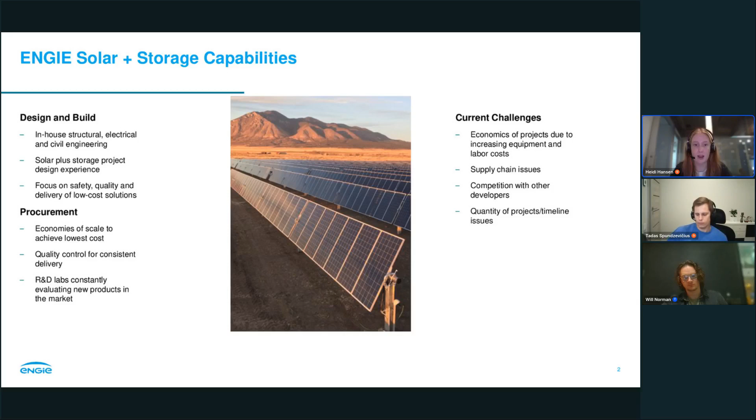One other issue I experience a lot is just our quality or quantity of projects and keeping those timelines on track. So each project needs to go through several people and several teams within my business unit, and it starts with me. So I need to make sure that my design process is really efficient and effective. We're proposing over 200 rooftop sites a year, and that's just rooftops. We also propose ground mounts and carports and battery storage projects. So I need to make sure that my design process is as efficient and effective as possible so that we can be successful. And that has really been where PVcase has been helpful to us.

There are numerous benefits of using PVcase roof mount, but I will just go over a few of them right now. One thing is it is a huge time saver. I would say the average rooftop layout probably takes me about half the time it used to now that I'm using PVcase roof mount, which has been a huge help. I'm able to design several rooftops in a day now, whereas it was most likely just one rooftop I was able to put out a day before this. And another thing is I feel there's an increased accuracy with using PVcase, so I'm able to feel more confident in my drawings.

One reason for that is their shading tool. You're able to input the location of your rooftop, the size of your obstructions, the height of your obstructions, and it automatically takes all of that into consideration when estimating the shading effect and where the shading is going to be on the rooftop. I feel that adds increased accuracy to my drawings. It makes me feel more confident and leads to less redesign down the road.

On the topic of redesign, PVcase makes it very simple. More often than not, I'll need to go back into a rooftop I've already designed and change the spacing or the size. With PVcase, this is a half an hour task. I'm easily able to go in, change a couple inputs, and re-input all of the modules onto my design. It has made that process so much more simple and quicker.

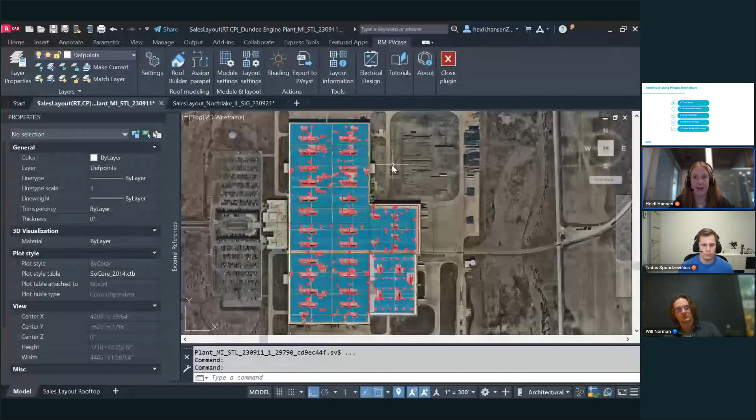Now I will give a couple examples of projects that I have worked on within PVcase, so you guys can see. I'll start off with this example - it is a relatively simple roof, kind of a basic rooftop that I see often in my design process.

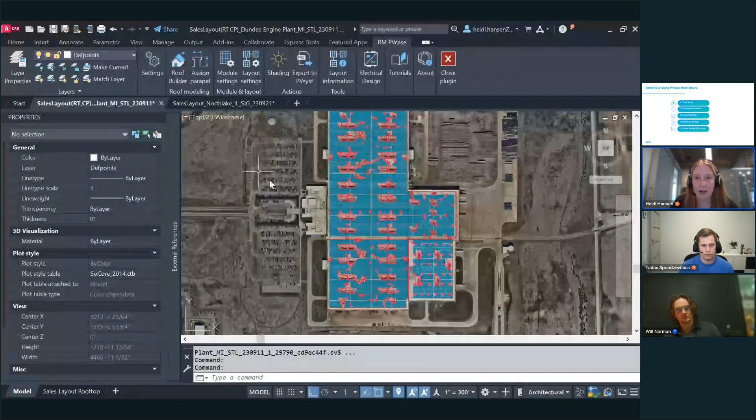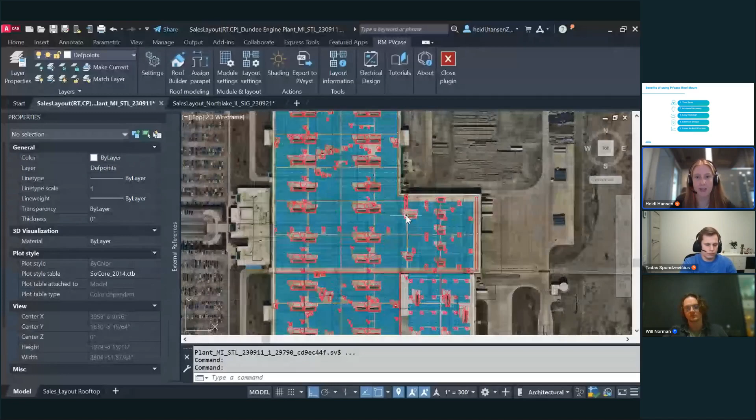All I needed to do here was go through and outline all the obstructions - there are several AC units, skylights, other things. So all I needed to do was find those. Then using the Shading button, I was able to see what their shading predictions would be, add height to them, and then just input my module settings, layout settings, and essentially click my rooftop area and it filled it with modules. Once I've done this, all I need to do is go in and clean up the drawing, and that's a 20-minute process. It has really been a huge time saver and so simple to build these rooftop designs now that I use PVcase.

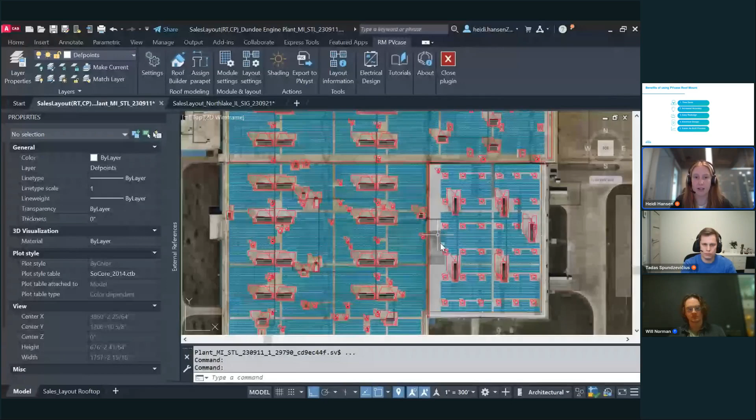One other thing I'll comment is you can see here that I have drive aisles throughout my array. For fire code in the US, you need a limit of 150 feet by 150 feet of an array - it can't be larger than that. There needs to be a drive aisle every 150 feet. Before, it used to have to be me manually measuring 150 feet and adding a drive aisle, but here PVcase automatically does it, so that saves me a lot of time.

Now I'll show you a little bit more complicated example. As you can see on this rooftop, there are a ton of obstructions, a ton of parapet walls, and several places where the rooftop meets another rooftop - it is just a mess. But more often than not, I'm having to look at rooftops like this. Maybe we will be bidding on a portfolio of several rooftops, and most of them look good, but there are a few like this. Before, I would maybe need to spend all day just trying to figure out how much I could fit on this rooftop, what it would look like.

I just need to spend a couple hours getting all of the obstructions outlined and all of the shadows inputted, and then PVcase fills it in for me.

This has been a huge time saver because oftentimes on buildings that are so obstructed, we may not even end up bidding on it, but my sales team wants me to look at it. So instead of spending almost an entire day on a rooftop that we're not even going to build, I just spend a couple hours to tell my sales team, okay, we can only fit this much on the rooftop, this is what it's going to look like, it's not worth it for us. This has been a huge time saver and really made a difference in my workload.

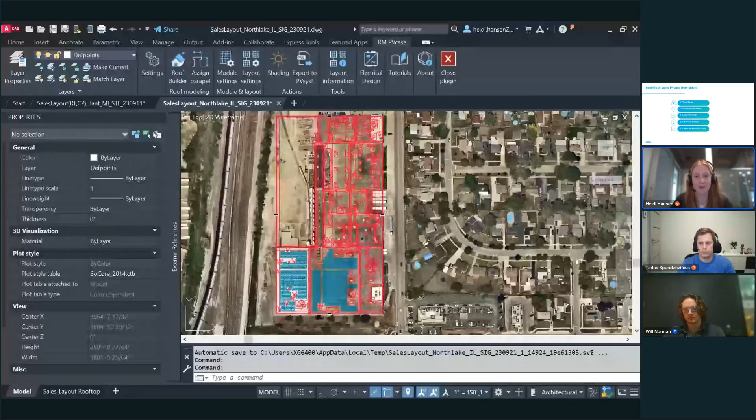Okay, Heidi, thank you very much. First of all, just want to double check if you can hear me. Yes? Okay, wonderful, always like to make this pre-check.

Thank you very much for your presentation. It was amazing to hear the size of project you're doing. I still have a couple of questions, if you don't mind, based on the presentation you've done. One of the things you mentioned is that as the Engie group and as yourself, you're trying to prepare as accurate a design as possible at an early stage, to prepare your quotation as close to the final product or final design as possible. Does this take into account any iteration, or how do you usually arrive at that final layout? Do you just design one approach, or are you comparing a few different layouts? Could you share a little bit on that topic, because it's quite interesting to understand.

Yeah, many times I will do several iterations on a rooftop and need to go back in and redesign. PVcase makes it really nice where I'm able to see all of the iterations I've already done on this design, and that has been really helpful. Often I'll need to change spacing and do several iterations on that, and PVcase has been really helpful for that and a huge time saver on it.

Okay, wonderful to hear. The other thing I'm also interested in is related a little bit to the supply chain. Of course, Engie has an amazing way of managing this by purchasing things up front and stocking them in your warehouse. But from your experience, how often do you need to redo even your early stage design? Because, for example, the module supplier changes, or you decide to use a different inverter, or some other things come up. So is it often the case that you need to redesign what you already did, or is this more exceptional, rather than the rule?

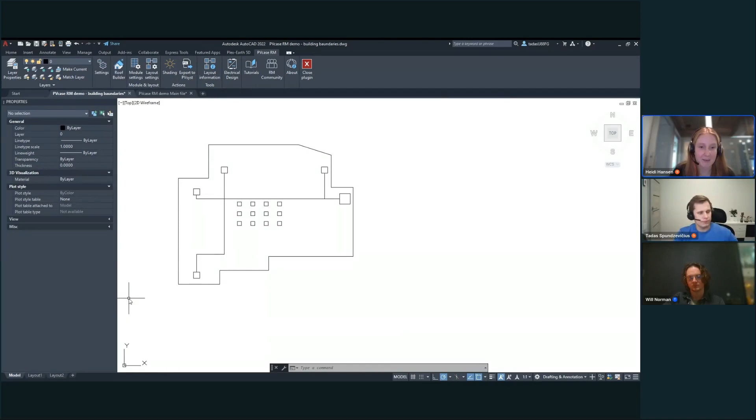Yes, I would say it took me less than a month to get PVcase down. Me and my colleague worked very closely with Tadas, and he helped us understand the product. But I think it's really simple, and for any AutoCAD user it's really easy to pick up. Once you get it down, you're able to do the process so quickly, it's like muscle memory.

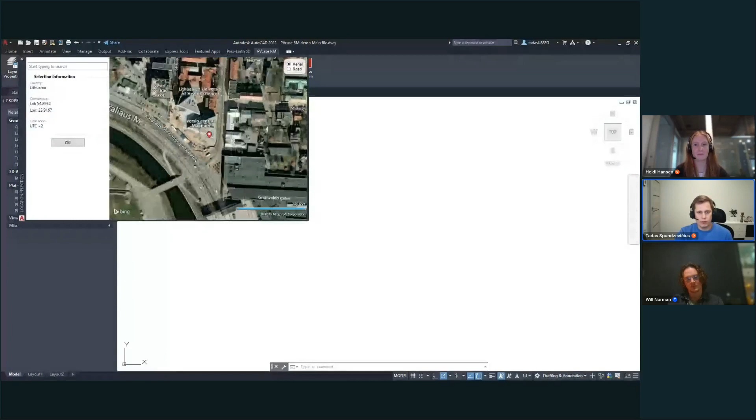The way how we can start the design, basically there are two main principles. The first one, we allow you to import the satellite image. Keep in mind we can also use different metric unit systems, like metric, feet, inches. But what's most important, we can just set up a specific location where we want to import our satellite image. For example, here we are in Lithuania at our headquarters. So we set up one of a warehouse or manufacturing facility, and this gives us the satellite image.

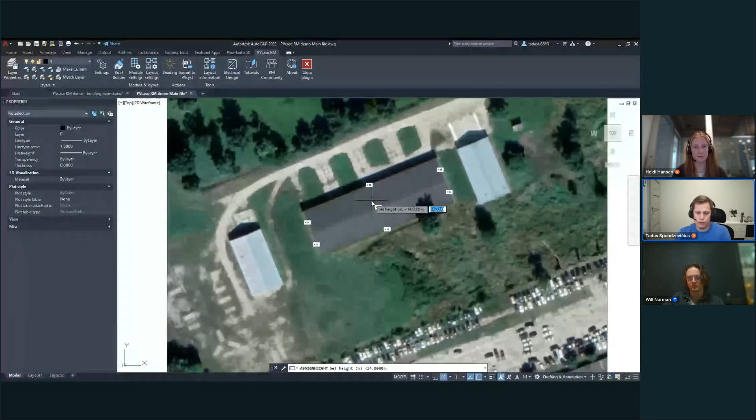Of course, on this satellite image we can draw as a simple AutoCAD file, let's say defining the boundaries, assigning the height of a building, and this will be created as a 3D building. If it has a ridge line or different slope, this could be recreated as well. So this is one approach when we start design just by having a satellite image. Usually this is used at a really early stage, when we don't have a lot of information or haven't had a chance to visit the site.

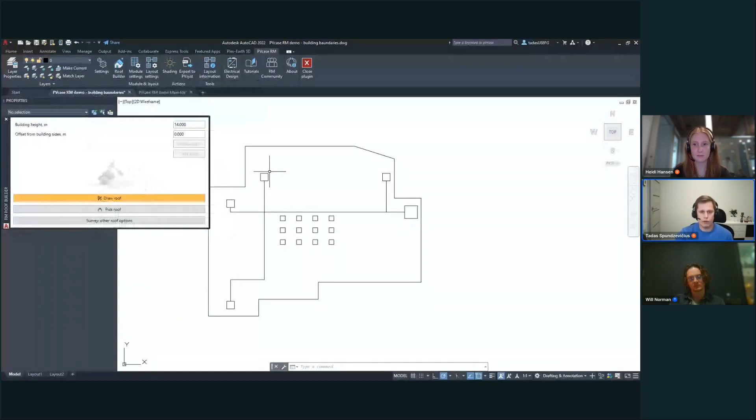If you're at a more detailed stage, there's another approach where we can use the existing building boundaries. In this case, I have a simple 2D building boundary with some elements in it. The software will allow the user to recreate this in a 3D manner, from 2D to 3D. I think this creates a lot of value for users because you can see and exactly understand how your project will look. First, adding the building itself, adding the parapet of a building for more precise evaluation of shading elements and the shading impact.

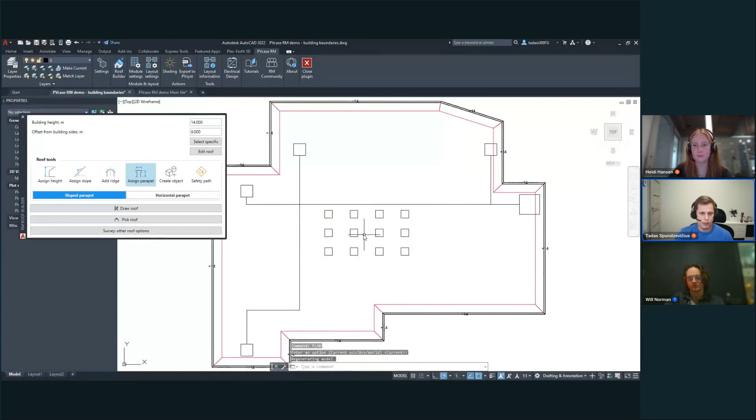Of course, we can set up a setback from the edges. This also allows us to share this view with a customer for a better understanding. Similar elements, usually found on the roof, or obstacles, could be converted from 2D elements to 3D, or just added accordingly to our predefined parameters. So always keep in mind there are two ways you can convert or add the elements. Also, you can define the safety path and all the similar elements which you usually find on the roof. For example, we have an AC unit - here it is.

We can define the restriction zone, the height of it, and simply pick up from the drawing. So we have 1, 2, 3, 4 of them, and they will be converted to the 3D elements. For the end, if we have entrance on the roof, we can also convert this one too.

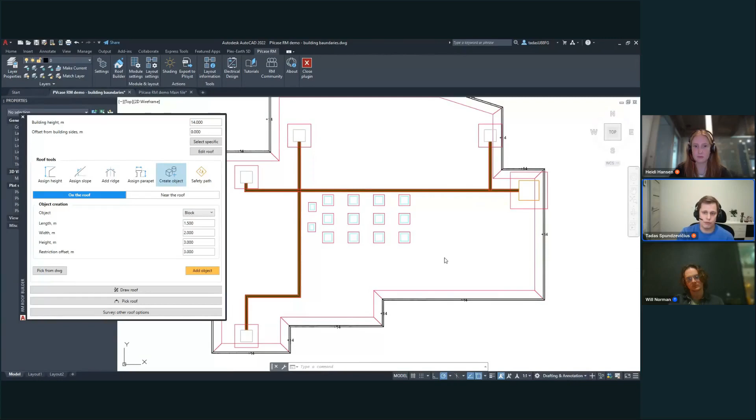We often get asked whether PVcase works with AutoCAD LT. Keep in mind this one is compatible just with the full version of AutoCAD because it's using 3D elements for the design proposal. If you look from a 3D point of view, everything created is a 3D element, and AutoCAD LT currently doesn't have the capability to read or understand these elements.

Now this is just the beginning of the design. Meanwhile, first of all, we just set up more or less how our roof will look and what kind of capabilities we will have. Let me add some restriction zone as well here, adding some area, and now we have our roof defined.

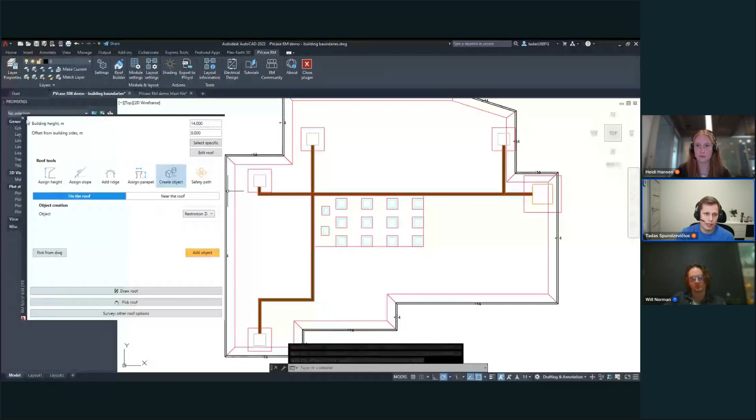The other thing we wanted to point out, which is really useful and I think a lot of businesses and engineers doing design also take into account, is shading analysis. PVcase right now has a first shading analysis tool. Later on we will introduce an improvement, which will be available in less than 2 weeks.

The current version analyzes shading based on the sun position angle. Basically, we take into account the location of the project, the day and time set up, and based on that we take the sun position angle from a database.

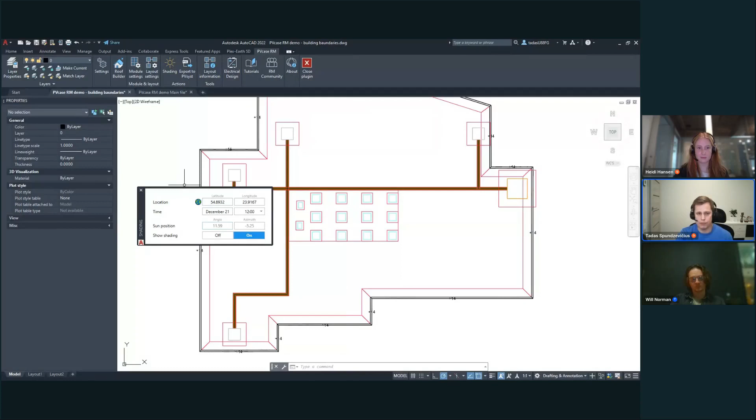If you change the time value here, you'll see the sun position adjusted accordingly. We can also set up and change the date - for example, April, let's say 2 o'clock - and you see the sun position angle, and this will cast the shading projection. If you change the time value throughout the day or year, you'll see a different shading projection created, and this is automatically created as an offset area, without placing any modules.

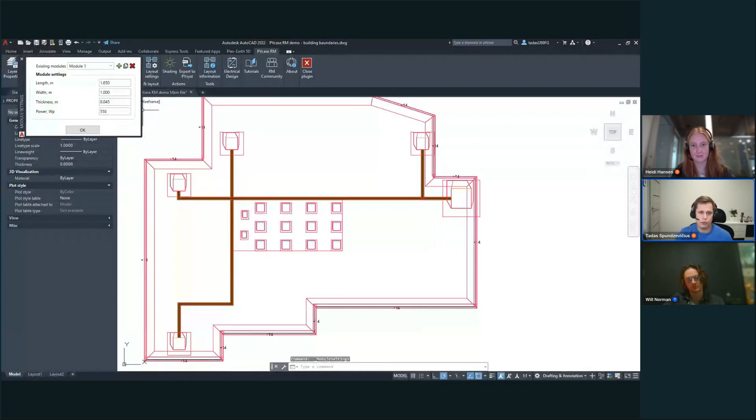Now, to place our modules, this is quite simple and straightforward. As Heidi mentioned, we just add the module dimensions in the product - length, width, thickness, and power. We add the layout settings.

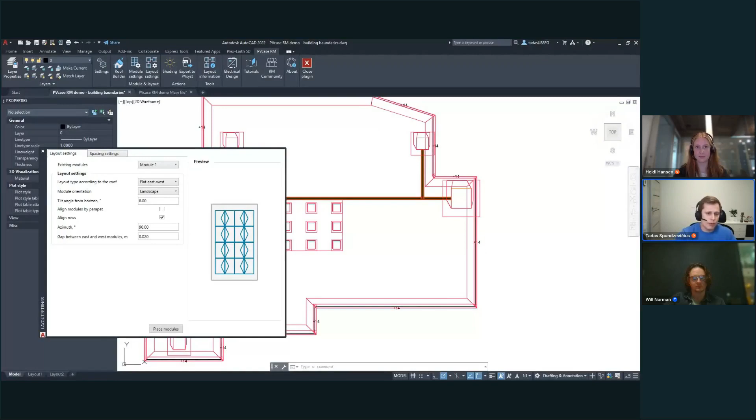The layout settings first of all allow us to set up a different system - for example, flat south system, east-west system, flush mount system. This even enables the user to define and create a few different system types on the same project, on the same roof. When we create the roof, we simply generate the layout on the whole area where we didn't exclude placing modules.

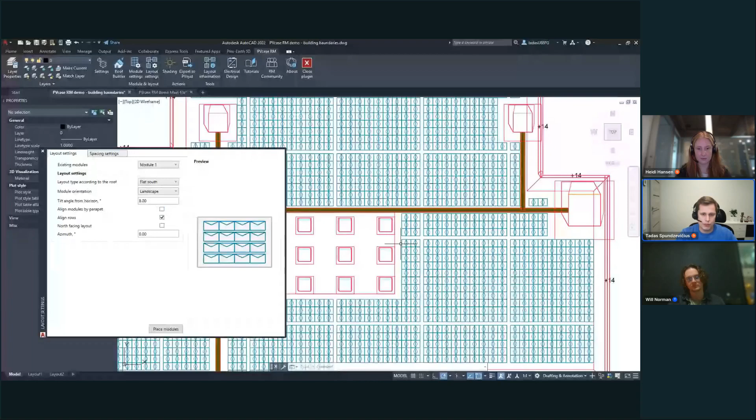The other thing that's really simple to do is make iterations. For example, now we have a layout for an east-west system. I'm just quickly adjusting a few settings - later on I'll explain in more detail why I did it. Let's see, now we also generate a flat south system on the same roof without changing anything. As you can see, it takes just a fraction of time and the layout will be regenerated.

What we can see from this, and what we can already compare, is the installation capacity, the module quantity, through the layout information. The software saves each of the drawings we've done - you can expand the list and see the current capacity and current module quantity. Each of these layouts is exportable directly to PVsyst if you need detailed energy reports.

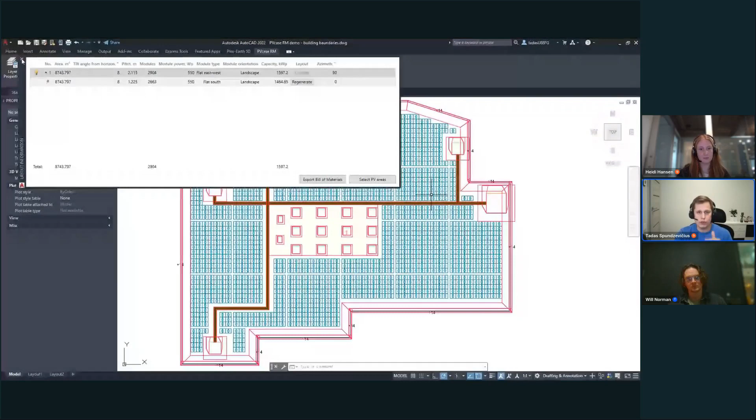Even more, we can always regenerate the previous layout, meaning you can go back and forward between a few different layouts, and this allows you to store them. Even if the customer wants to see an east-west system, flush mount system, or flat south system, you can simply do everything in one AutoCAD file, in one DWG file, instead of having 3 or 4 of them.

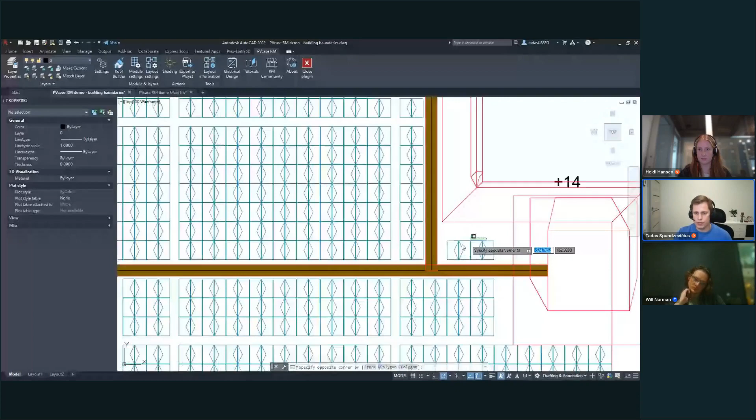Now about the customization of the layout itself - this is usually quite complicated with some tools if you want to customize everything to the module level. With the AutoCAD software, we allow customization of everything to the module level. The user can select and delete modules, move them around, and make all kinds of changes just as you would with simple AutoCAD block elements.

Now, what I didn't cover here from the spacing settings, but you can set up first of all the row spacing and the column spacing between modules. For example, this one specifically works nicely with east-west system.

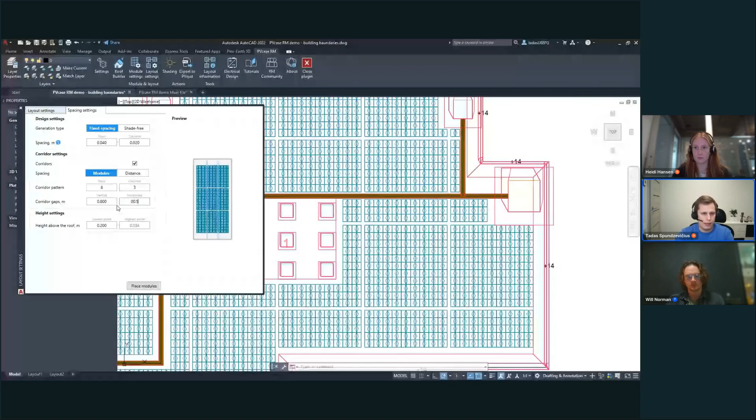On top of that, we can specify the corridors. For example, in USA, this kind of corridor is used for fire protection. I think they have a 30 feet requirement, but every 30 feet you add an additional corridor. Here in Europe, we can use a different approach where the corridor is based on the module quantity. For example, we have 8 rows, 3 columns, and this will create small subarrays, and in each of these subarrays we can place the string.

Let me show you how the result would look like. Quickly regenerating it, now I get the layout of smaller subarrays where I can nicely fit my string. Of course, we can look around and eliminate some of the modules which do not fit our needs. So this is basically how the layout creation and iteration works - we can really quickly and easily go back and forward.

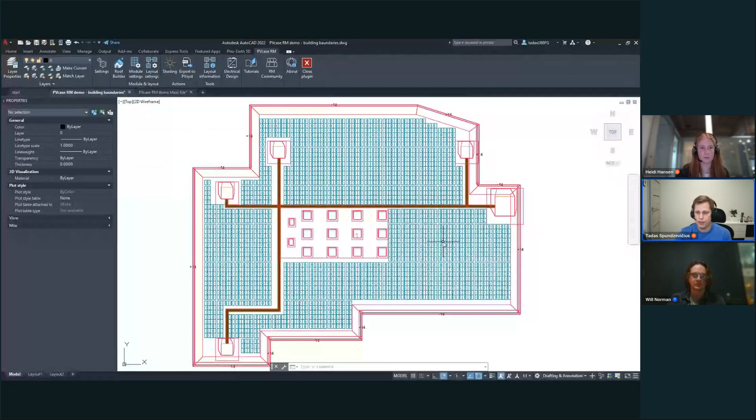Keep in mind that here we have approximately 1.5 megawatts, and it took less than 10 minutes to generate this layout. Now, on top of this, the next huge portion of the software is electrical design. As Heidi mentioned, even if you are not an electrical design engineer, you can still do some electrical estimation at an early stage.

But if you want, you can also do it at a really detailed stage with electrical design, because we allow users to configure inverters, meaning you can configure everything down to the MPPT level. So how is this done and achieved?

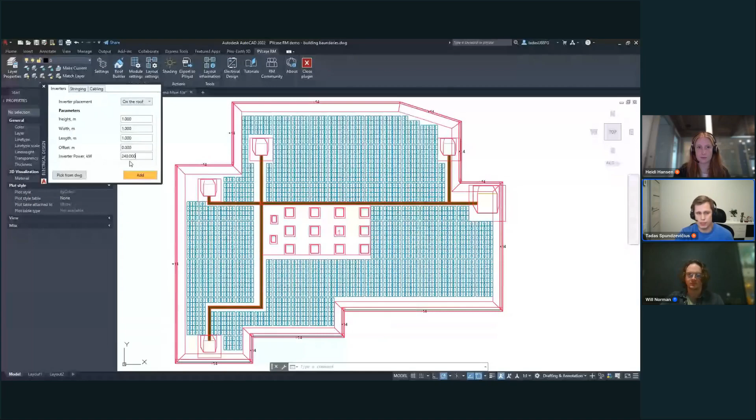First of all, we add the inverters. Inverters are defined with really generic parameters - we're not using any database because we don't need that. We add the inverters, let's say on the roof we'll have 6 of them if needed. Also keep in mind that inverters could be placed in different locations - it doesn't exactly have to be on the roof.

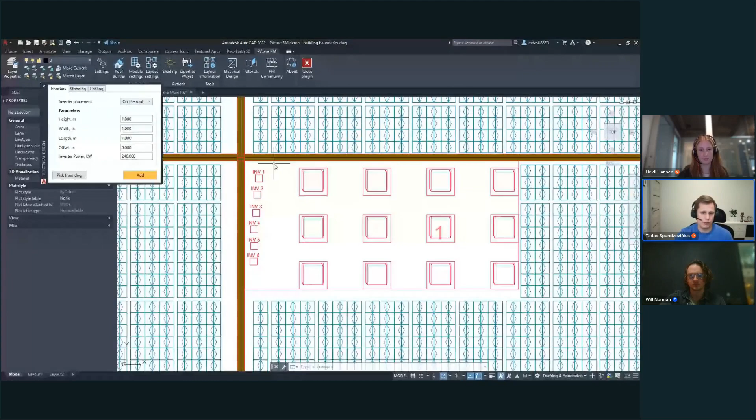You can place them inside the building as well if needed, and in that case you'll be able to define the height. So this simple approach allows you to use any inverter you want. Even if you have inverters with different size or capacity, you can define and add each of them separately. Just to give you examples, we're adding all of them with the same size.

The stringing - this is where the software could be really simple, but at the same time, if you want, it could help you make really detailed stringing. So how does stringing work in general? It works based on the string size, so we can define the module quantity per string, let's say from 20 to 24, set up if you need optimizers to use, and what stringing pattern to use.

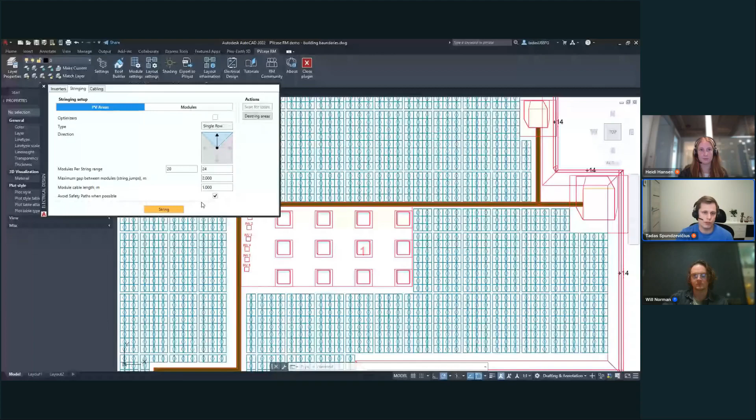So you can use single row stringing - in this case, software will cover the strings which can have just a single row. Let's increase this gap, then we can have a different stringing pattern. You can also set up a direction - is it vertical or horizontal? Of course, each case will provide different outputs. Software always tries to place as big a string as possible according to the defined settings.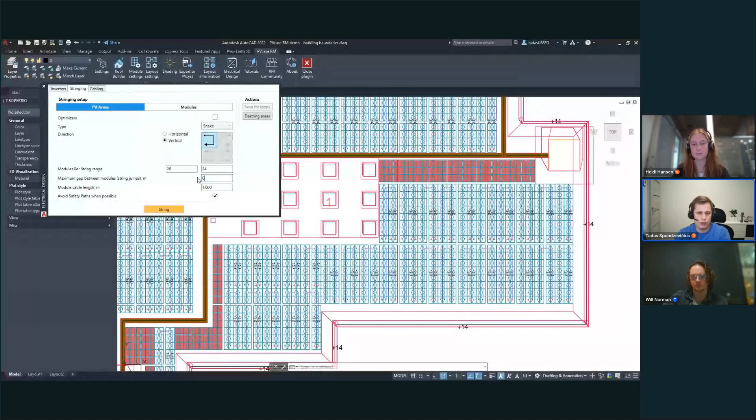My preference is to use this tool usually for detail design. So what you can do here is control the maximum gap between modules. Let me show how this works. I define this as 40 centimeters, then my corner gap is 50 centimeters. In simple words, I'm limiting the software to place the string within one small subarray. I can also define a module cable length to estimate and calculate all the gaps between modules.

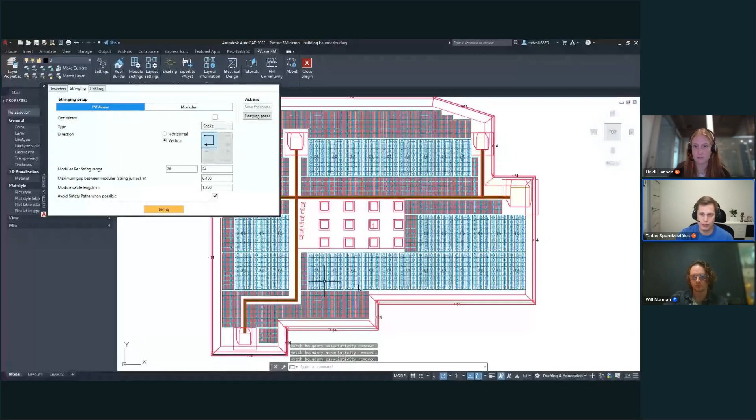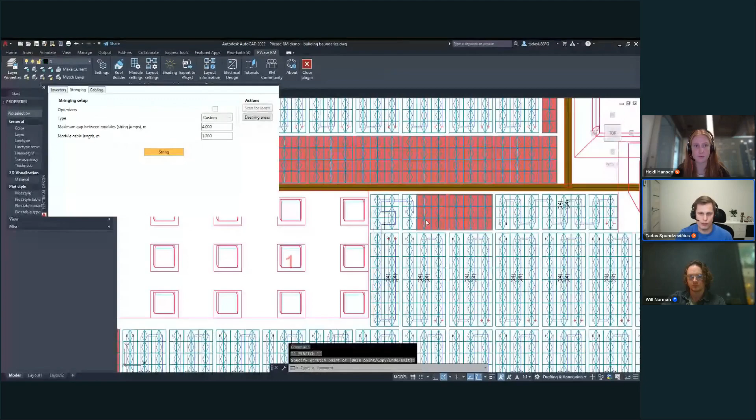And this gives me the initial layout. On top of that, I can change these settings, change how the strings will be applied, and get more detailed stringing. So let's see, selecting the zone where I want to work. With custom stringing, I can get even more customization - I can just draw a simple line on the layout, and as you can see, it's counting the modules for me. Everyone who has done stringing manually knows this is one of the biggest nightmares for engineers, just counting how many strings you will have.

Usually you just lost the number and need to redo it, and as you see, it could take just a few seconds. So this one is a more customizable approach, and you need to get the exact result which you are expecting, so then we can do it step by step. And of course, we will guide you even more for the user who will be interested to test it.

If you want to do it quickly, you can also define this parameter as 4 meters between two different modules, apply this for the layout. It will take a second, and it will generate the preliminary stringing throughout the layout. We can also change the direction, so by changing the direction, we'll get a little bit different output each time, because it starts to do the stringing from a different point. That's why the final result will look different.

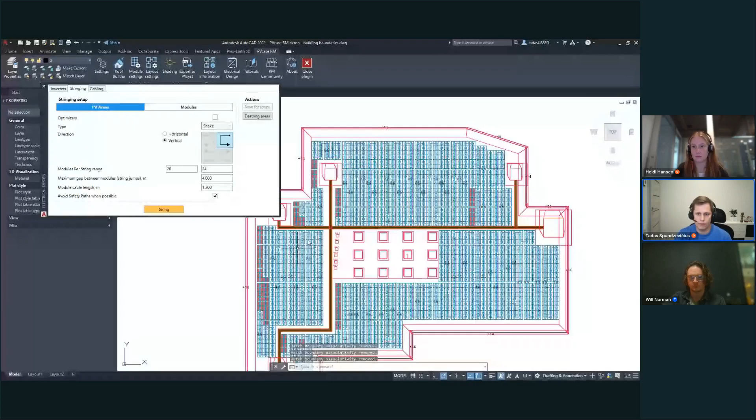Even at this stage, we can easily customize the layout by deleting some modules which we don't want to have, by extending the string. So for example, here we have 24 modules. Let's say we want to have 26. We can easily and simply customize this here.

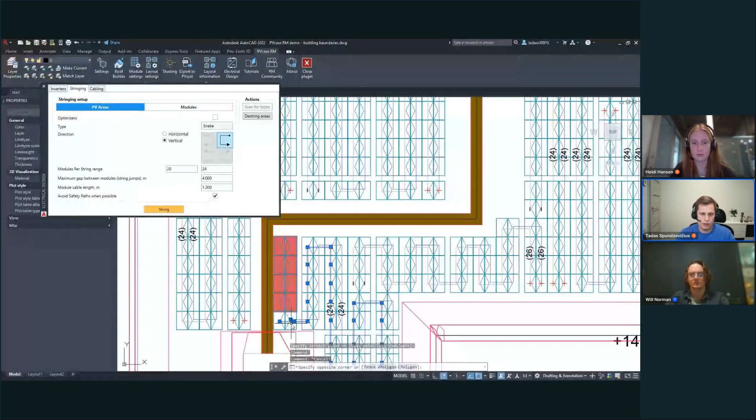And we can do the similar thing for the string. Just selecting the string, here it is, selecting the string and just extending to two more modules. So let's say we have a string here. Okay, let's do it like this, and 25. So I want to have 26. Here we go, 26 modules.

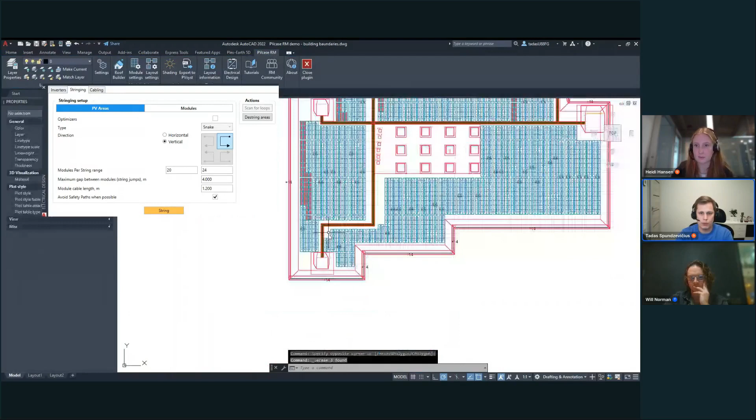Once again, we can eliminate some of the modules which are not necessary. If I see the position where I want to add some additional strings, I can simply do that. And of course, I can draw like a zigzag pattern. I can always use the Ctrl-Z button, let's see if I draw it incorrectly, so this will allow me to come back to the specific point. So the tool here is trying to become as detailed and customizable as possible throughout different engineering stages.

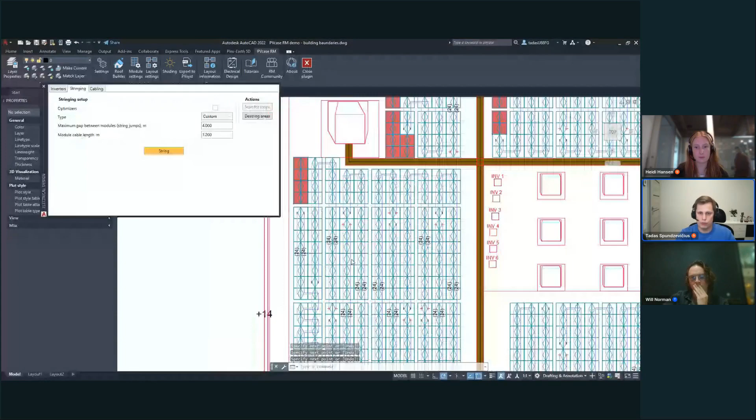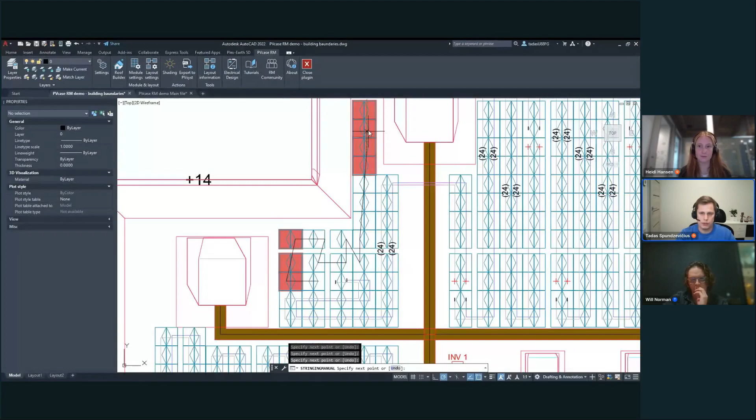Okay, let's move forward from the stringing. Let's say this is more or less the layout which we prefer to have. Let's add a few more strings. Oh, by the way, I didn't mention that every design which was done could be simply overridden. So as you can see, I'm just drawing a string on top, and the software automatically changes accordingly to my new pattern which was drawn. So let's add some additional string at this end. This one goes to 19 modules, and let's eliminate something that is not really effectively placed for us.

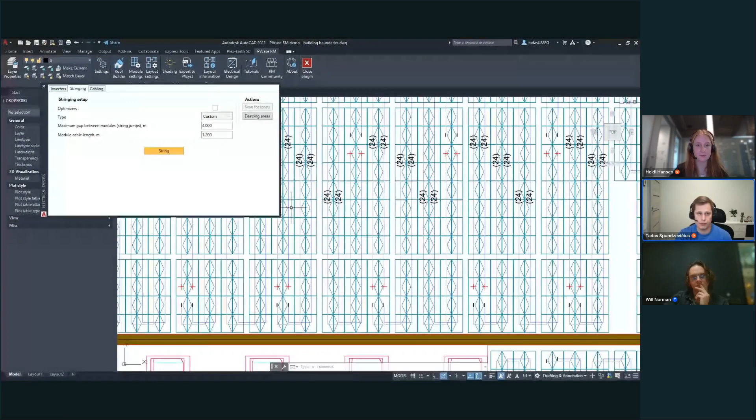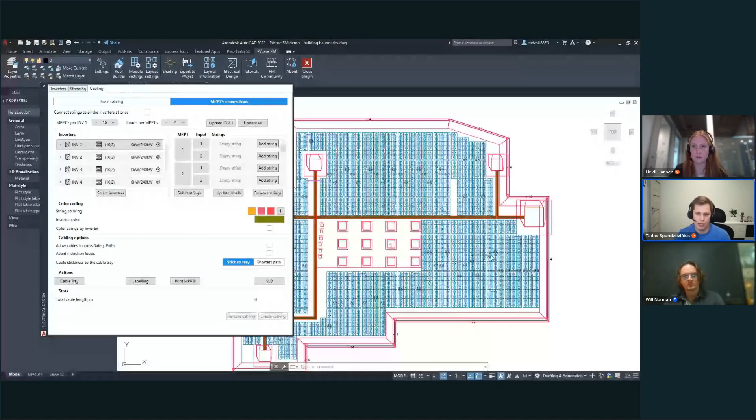Now, when I said we can do inverter configuration here, what the software allows you to do is set up the MPPT numbers per inverter. This becomes really handy because we'll have a really detailed design of the inverter itself. Then you can also update all of them automatically, or you can do it one by one. So for example, we can set up 6 inverters, we'll have just 8 inputs, 10 MPPTs with 2 inputs. When we did this, we can now do it semi-automatically, fully automatically, or fully manually, the assignment of the strings to the inverter.

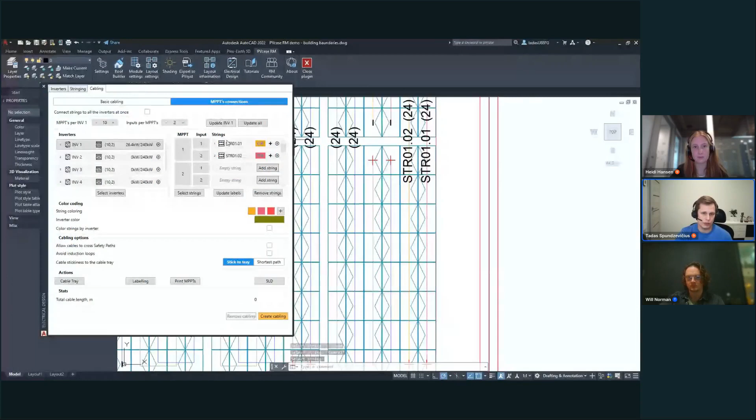So let's start from the fully manual mode. The fully manual mode will allow the user to have full flexibility and override any existing rule. It means we can set up input number 1, select which specific strings we want to add to that input. If we want to add a second string, we can do that as well. Keep in mind, in this case, I select one east and one west string and connect it to the same MPPT. Usually this is not the case if you're not using optimizers, but if a user wants, this functionality allows for that flexibility.

Now, the next step would be to do it in a semi-manual way. This means we will be capable of selecting the strings on the inverter level. So let's say we select this portion of the strings, so we have 14 of them. Let's add a few more.

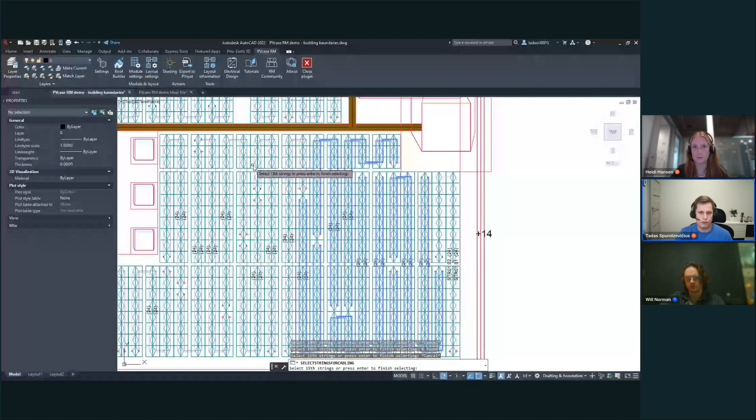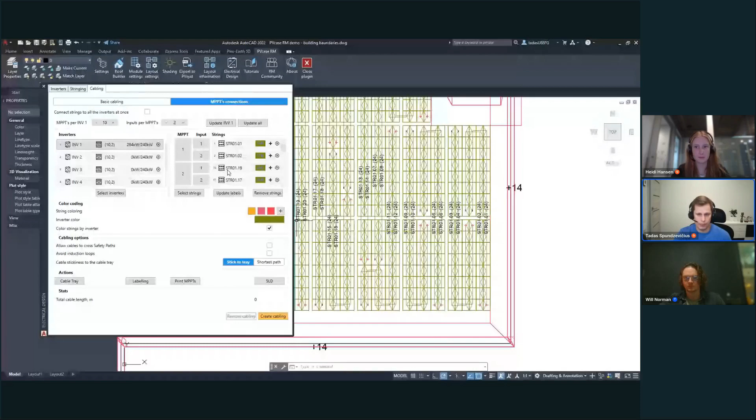Okay, let's say we selected this part. Let's deselect these strings, this one. Now we have the perfect exact number we need, and the software automatically assigns strings to the inverter. In this case, the software assigns the strings, separating the east and west strings to different MPPTs, so we are not mixing when doing it in semi-manual way.

Once again, just quickly show how this works. We select the inverter, select which strings we want to have it. In this case, I have up to 20 strings. Select the strings, apply the color, and here we go.

If we want to speed up the process even more, for example if we have a project of 4 or 5 megawatts, something very heavy, even this approach could become a little bit tedious. Let's say we want to speed up the work. So then we can enable the functionality to connect all selected strings to the inverters.

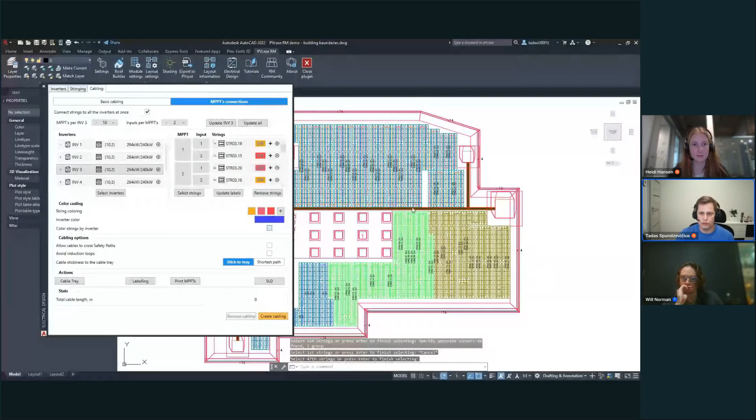In this case, we select a portion of the strings, so the exact number would be 46, which is 2 inverters plus a little bit more. We apply this functionality, so the third inverter will be fully filled with strings. Then we have a 4th inverter, which is fully filled, and the rest of the strings were connected to inverter number 5.

Keep in mind, we get the label on each of the strings. If you need, you can easily customize the label as well. Just change, let's say, what we will have here: inverter number, and maybe some additional string number. So just like that, it could be customized.

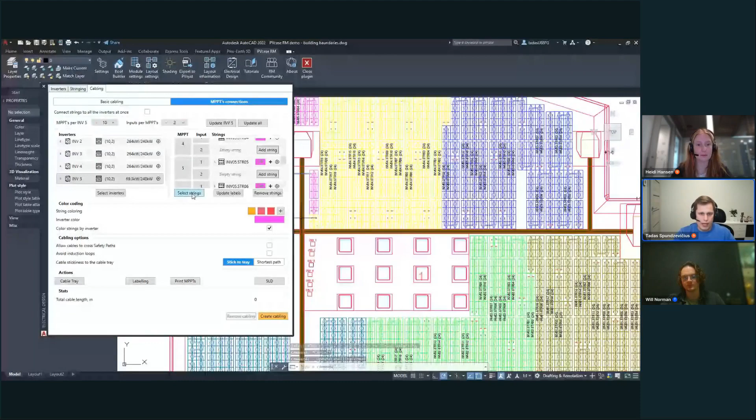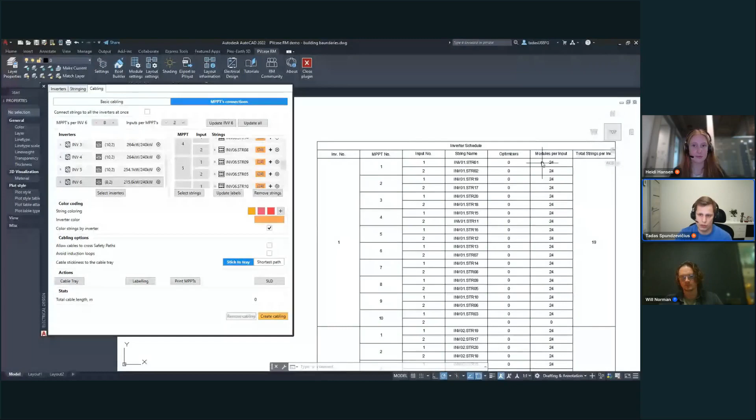As output of this step, the engineer can print out the MPPT connection table, which will give you understanding about the inverter number, MPPT number, input, the string connected to that specific input, and of course the string size. Majority of the strings will be 24 modules, unless manually customized to 20 or 26 modules.

From here, we can go even deeper. We can draw all the cable trays on the drawing by automatically sizing them, or just by setting up the size manually. It depends if you want the software to interact with us here or not. Basically, the software will, based on the cable quantities in it, change the size throughout the drawing. So now I just enable the cable tray sizing option.

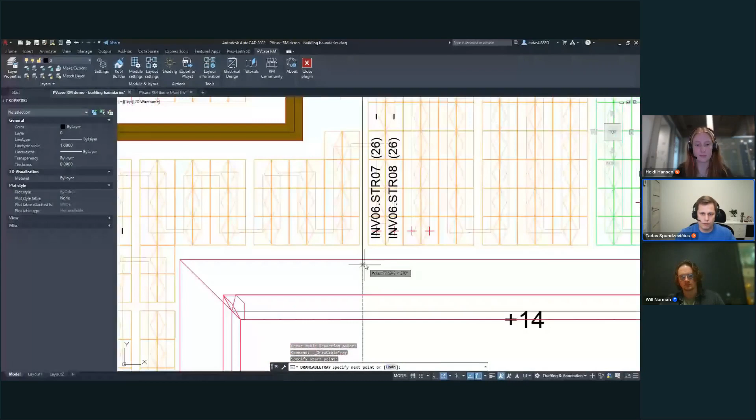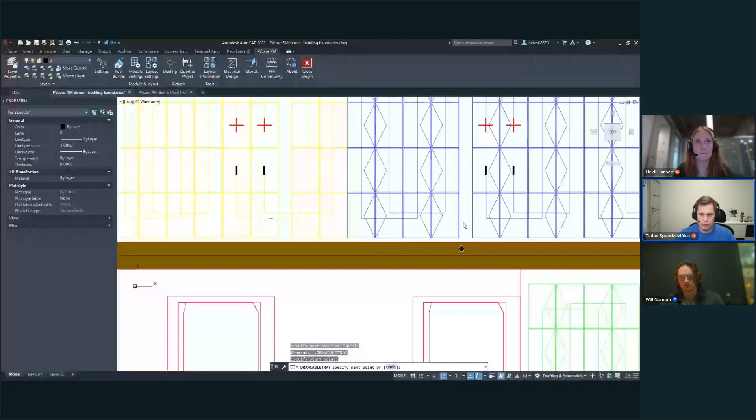I draw where my cable trays originally should be placed. For example, one cable tray here, another cable tray will add on the segment, so let's connect them at this point. Okay, let's say the third cable tray could be done here. And let's see, one more we will add somewhere here. Okay, let's do one more vertical cable tray, let's go from this end and then next to the safety path to reach the final.

Okay, now for the majority of the PV area, we have a connection pattern. Just adding one more cable tray, let's say at this point. Okay, so let's see, this is the cable trays which we will be using to create our design.

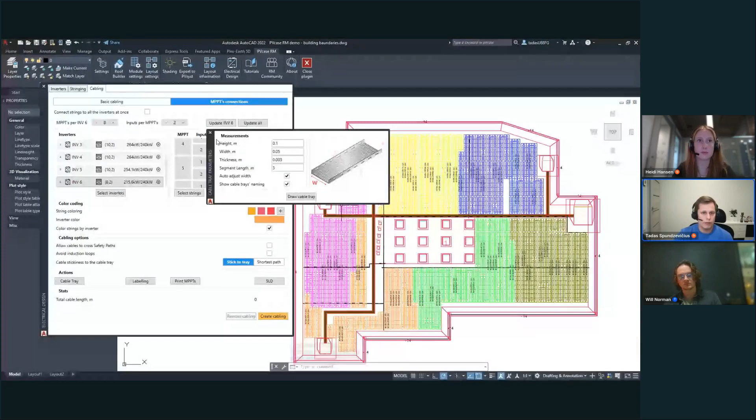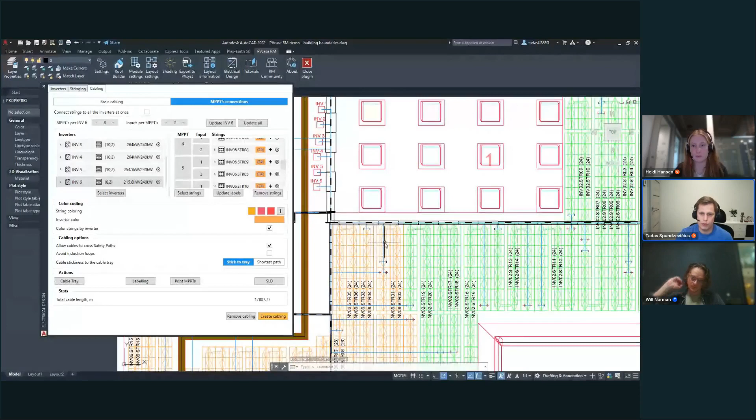The approach is really simple because we can enable the software to allow cables to cross the safety path if needed, and of course we can enable for them to avoid induction loop. To generate the cables, you just need to click one button, create the cabling, and this will take a few seconds—it will generate all the cables. This means we'll have a connection from each positive and negative pole, or positive and negative terminals, depending how we call them, directly to the inverter level.

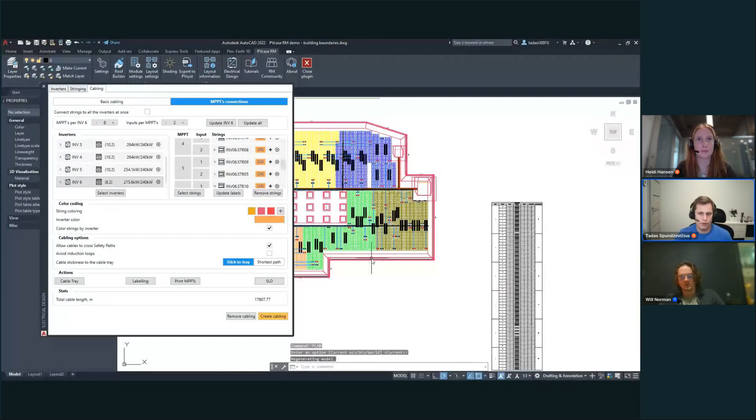So just this step could save, I would say, 50 to 60% of manual work. Also, each cable becomes a 3D element, so we evaluate the connection point, the table height, and similar things. An additional comment to mention is when the inverter is not on the roof, but for example inside the building or on the wall outside, we also draw a 3D cable to that point too.

As the result of this step, we can produce a single line diagram of all the elements which we have up to this point. So you will have the inverter, you will have the MPPT, you will have each of the inputs.

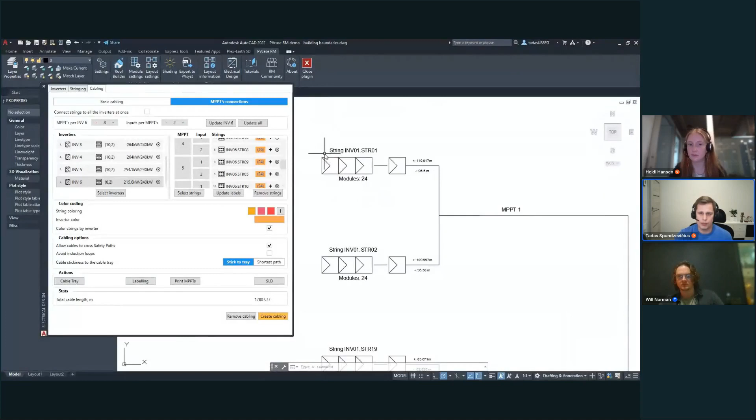As you can see, this is a string name, but it will be easier to see. And then we have a cable length in meters from positive pole or terminal to negative pole or terminal.

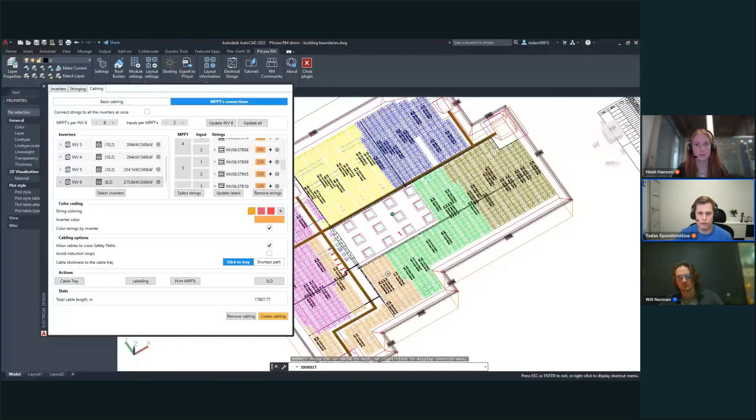Also, all this data which we have designed up to this point is in 3D. So everything we have added is a 3D element. It takes into account cable trays, cable itself, modules, inverter. That's why it's a full 3D design which you'll have in AutoCAD.

Of course, you can print out or copy the whole drawing, or just print out a specific part. We rely on AutoCAD functionalities to provide the printouts of the drawing.

What we provide on the PVcase side is the bill of material. We can find this through the layout information, and there's an option to export everything to an Excel file. Export bill of material generates the Excel file where you will find all the necessary information.

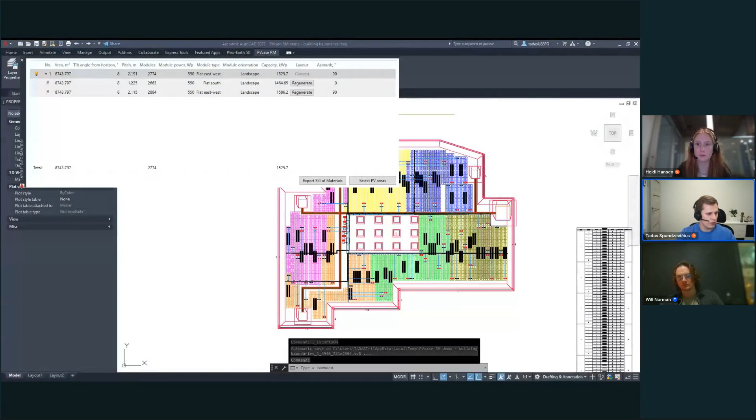Okay, let me just create this Excel file, and I think I will need to reshare my screen. Now you can see this one. Give me one second. Let me stop sharing my AutoCAD screen, and I will share my Excel sheet. Here we go, now it should be visible.

So what we get in the Excel: first of all, we get the total capacity. This drawing which we've done has 1.5 megawatt. Not really small, but a quite decent project, taking into account that it takes just about 20 minutes to do that.

Then we have a module power. We have a 550 watt module. We have the module name, and this is all the dimensions of the module.

In addition to that, we have a really detailed list of each cable tray. Let me explain how this works. In our drawing, I'll show you in a second, we have cable tray numbering. It means each cable tray has a unique number, and the cable tray is basically divided into segments, each a 3 meter length.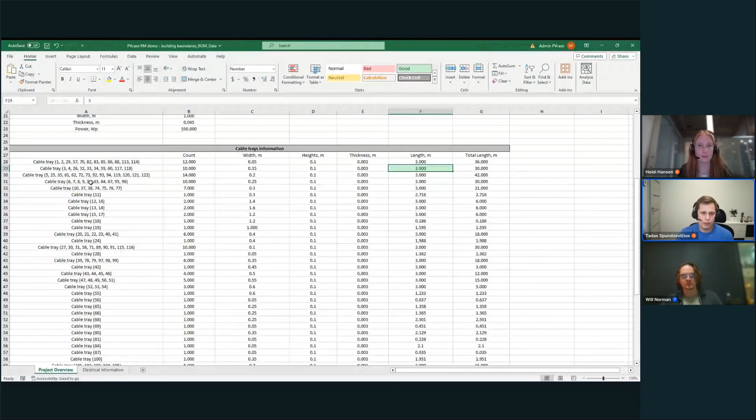That segment will list all of them according to the size, or we call it width. So according to size, all of them will be listed here, and you will see the total quantities.

Usually we get the question, why is the list so long? Because some of the cable trays, let me just mark them with a different color, are not exactly 3 meters. When we're dividing the specific distance into 3 meters, usually we have some smaller pieces, so we indicate each of them separately.

So the engineer could make a decision what to do, maybe increase the size of some of the existing cable trays, or instead of buying 2 different cable trays, buy 1 cable tray at this point. This functionality allows you to quite easily maintain and reach that goal.

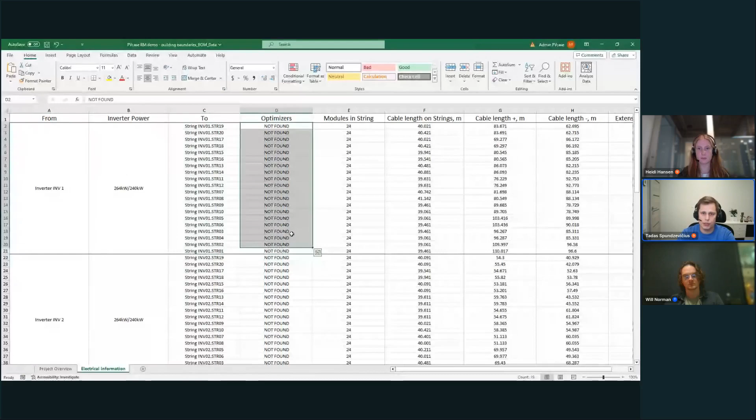The other thing we export as a bill of material is the electrical design. We will have the inverter, each string added, each optimizer, each module quantity in the string added, and then we have cable length.

There are 4 different cable lengths provided here, let me explain each of them separately. The first 2 are quite simple: cable length from positive and negative pole. You already saw this in the SLD, so it's the same here.

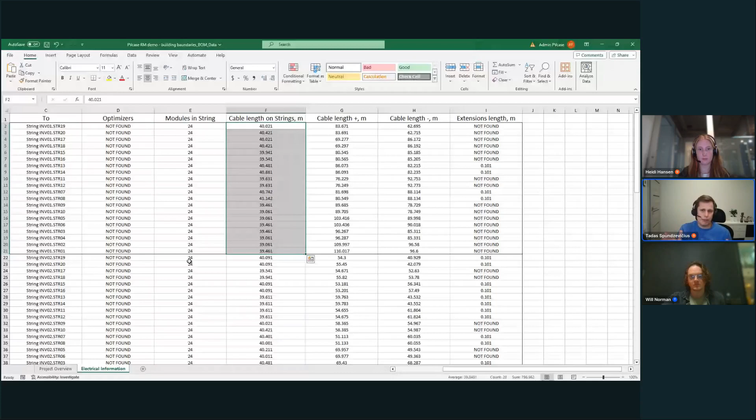In addition to that, you have a cable length on the string. This is the cable length needed to connect all the tables from positive to negative pole. In some cases, the original cable that came with a module won't be enough, for example a 1 meter cable length that's not enough.

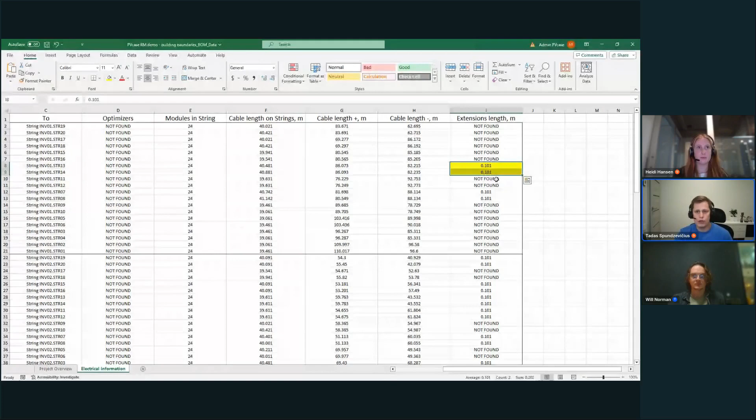In those cases, we need to add extensions or jumpers, and this is exactly what we have in the extension tab: the additional cable you will need to cover your stringing. Each extension is marked in the drawing as well, and we do this on a per-string level. Here we accumulate the total length, but in the string we have each of them provided separately.

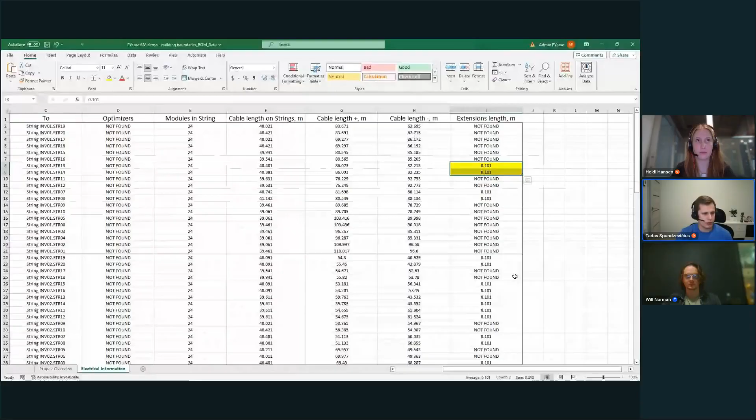So this is more or less how the AutoCAD works. Just coming back quickly to my AutoCAD file, because I want to share a few things I mentioned I didn't show you yet. Okay, here we go, now it's visible again.

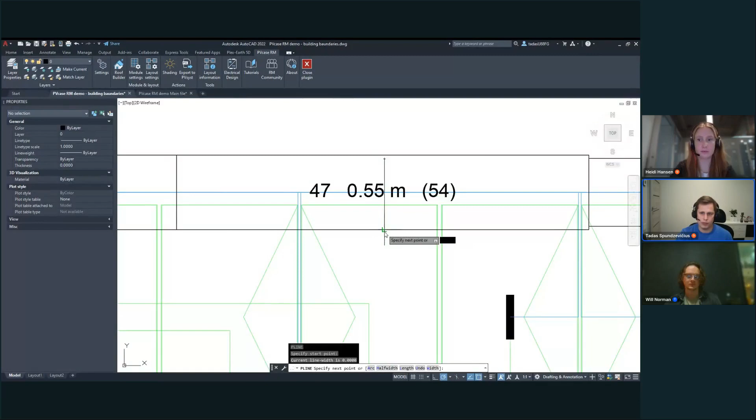So this is what I mentioned about the cable tray number. We can see the cable tray number on each of them, 48, 47, 46. This is the size of a cable tray, 0.55 meters. And this is the cable quantity unit, 54 cables. Let's see, here we have 42 cables.

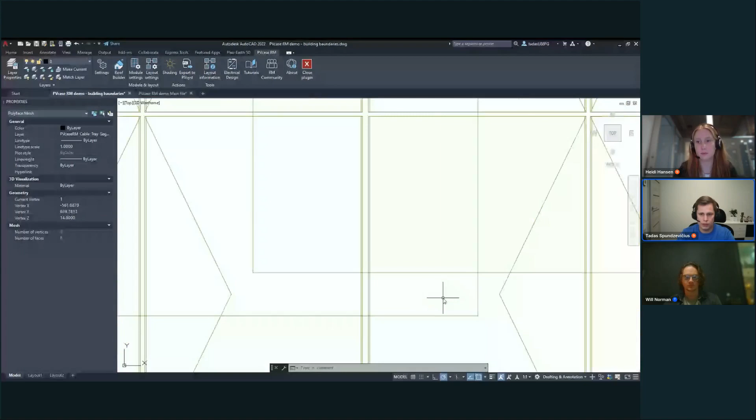Of course, each of them could be edited if needed. So here we also provide full customizability and input from the engineer side. Let's say I want to increase the size of this cable tray. I can easily view it, re-export this one to Excel, and I will get the new layout. And that would be, yeah, I covered this part.

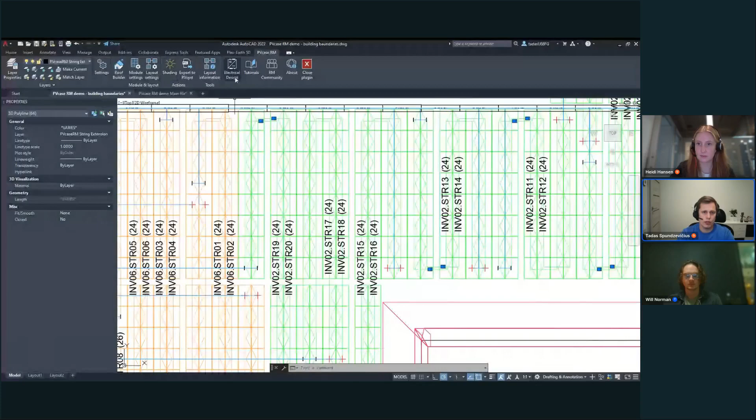Now, what I want to show you once again is the extension or the jumper. So this is the jumpers. We can select all of them throughout the drawing, and we will see the total quantity of them. So in this specific project, we will need to add 66 jumpers or 66 additional extensions, because our cable length, which we used, was not enough. Just to clarify, we used 1.2 meters.

So this is more or less how the product works, what capabilities it has. And I know you guys have some questions in the question bar, so I hope myself and Heidi will be capable to answer them. Okay, let me stop sharing my screen.

Here we go, Heidi, maybe any comment or question from your end, because I know you even using the software, but always when you're seeing it one more time, maybe something came up and something you would like to highlight.

I honestly have no comment, Tadas. You did a very thorough summary of it right there. Okay, wonderful. Yeah, that was really informative, guys.

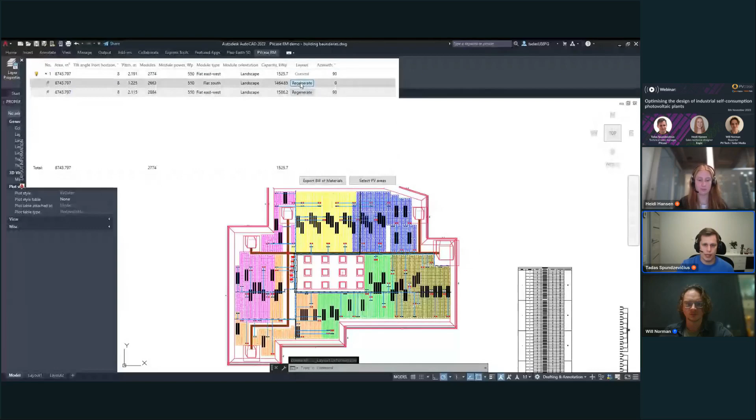Tadas, I wanted to ask you first. Can you make different iterations of the same project inside PVcase? We already touched a little bit on this, but iteration, as Heidi mentioned, is quite important, you need to prepare a few different layouts. Yes, you can definitely do it. You will be capable to do it through the layout information section. I already showed this, so just want to repeat that you will find this in the layout information, and each project which you've done will be capable to regenerate at any point, and even all the electrical design will be saved. So it means if you design something and want to come back to your previous drawing, everything you've done up to that time will be saved.

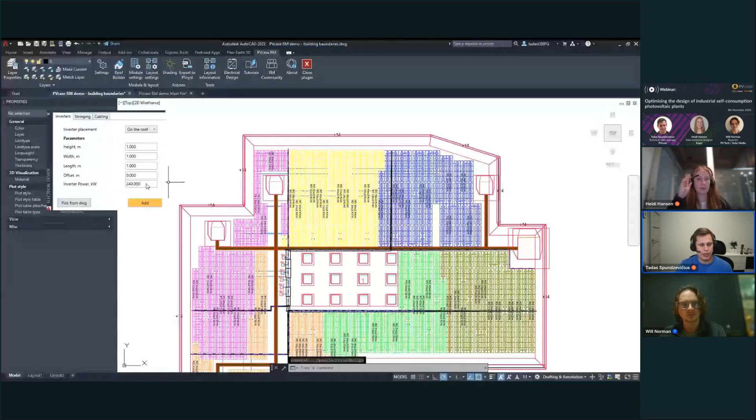And on the subject of electrical design, what limitations are there for electrical design? That's a really good question about the limitation. The main one which we have is we are not running any calculation. As you saw up to this point, we're not using any database. So basically it has to be defined by the main inputs from the engineer side, and we are not checking the compatibility. This is something what we will develop and add in the future. But for now, we rely on the input provided by the engineers, not calculated by the program.

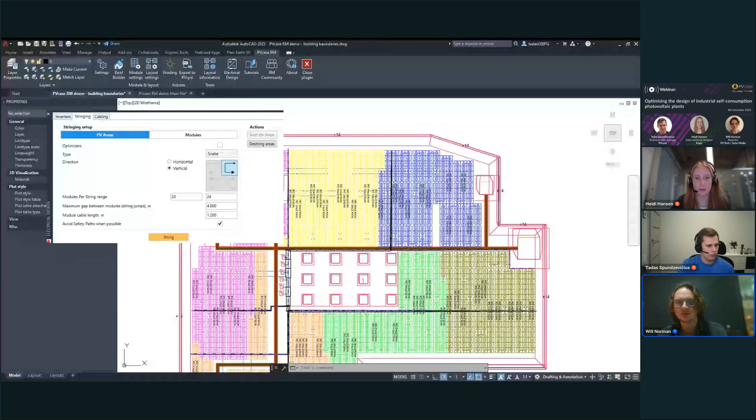Heidi, I wanted to turn to you as well. Has your design process changed, or is it affected by safety measures when you use PVcase? Yes, definitely affected by safety measures. Some of the points I've already hit and Tadas has talked about is adding in those drive aisles. Those are key on a rooftop design, and PVcase makes that so much easier. And then another topic I touched on was the rapid shutdown devices, and designing in a way where we don't need to use those really increases the safety on our sites and gets rid of an entirely risky material. So safety is very important in my design process.

Okay. And if you're analyzing a rooftop that's heavily obstructed, what does your process look like there? How does it differ from a normal one? Yeah, so in a normal one, I'll just immediately start outlining all the obstructions and sort of getting their height information.

But on a more obstructed roof, I'm trying to look at the distances between obstructions, what kind of height they have, so I can see is their shadow going to be really large, is that going to take up most of this open space. And just analyzing how big any open spaces with no equipment and no obstructions are, to see how many modules can we realistically fit on this rooftop.

I was just going to turn, we had an audience question just come in from Francois asking, is there any calculation report for cable loss and the sections for the AC electrical protection?